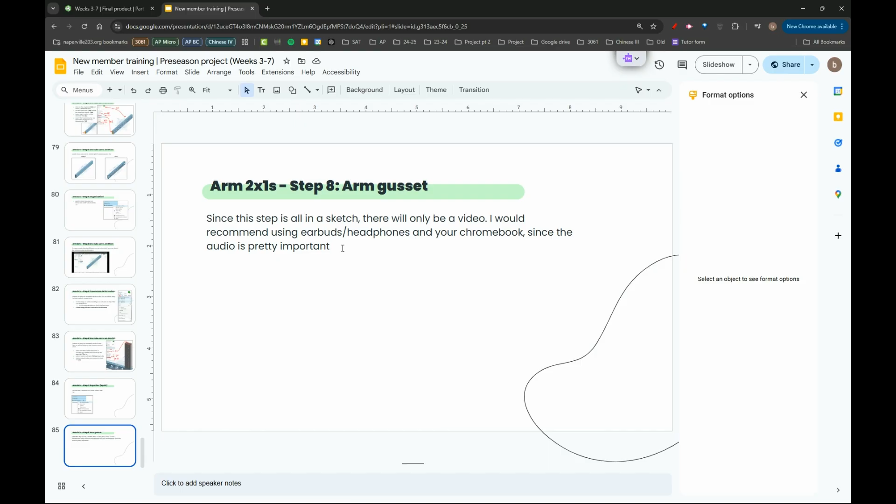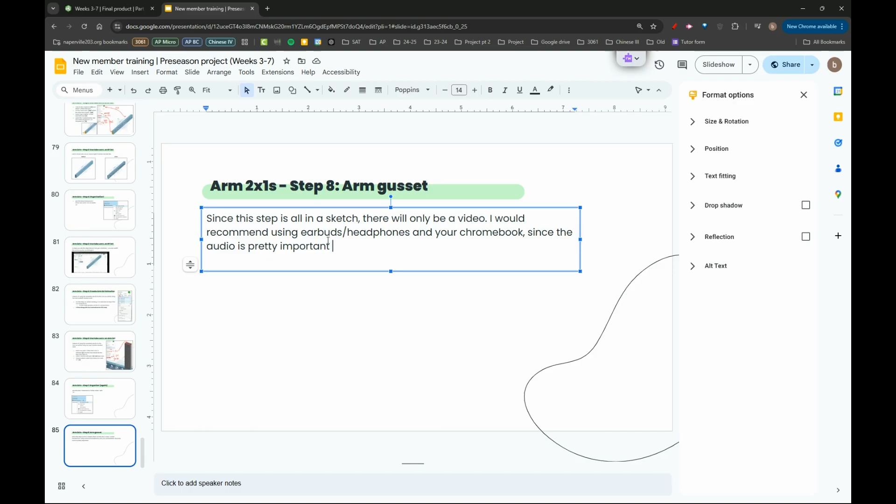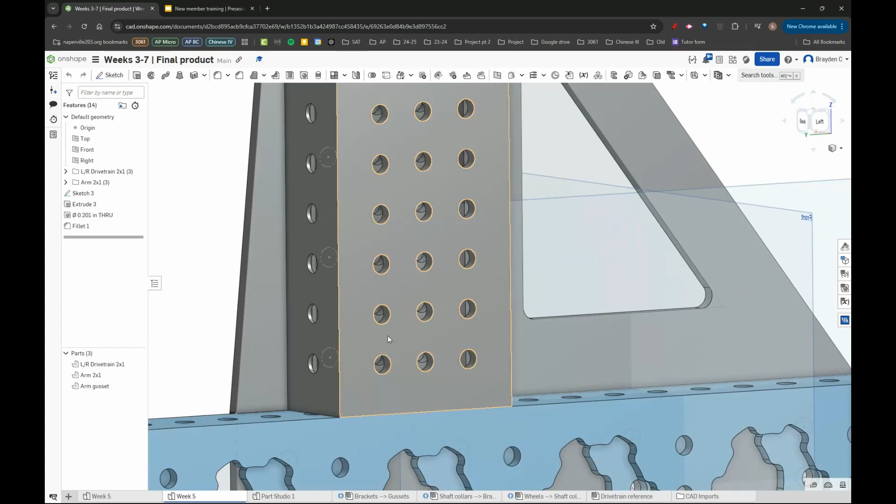So the gusset should look like this when we're done. You can kind of intuitively tell why we need this gusset, right? This 2x1 doesn't magically attach to this 2x1. There's screw holes here, but there's no screw holes for this 2x1 to directly connect. So instead we use this technique using gussets - we've already used it to attach the motors.

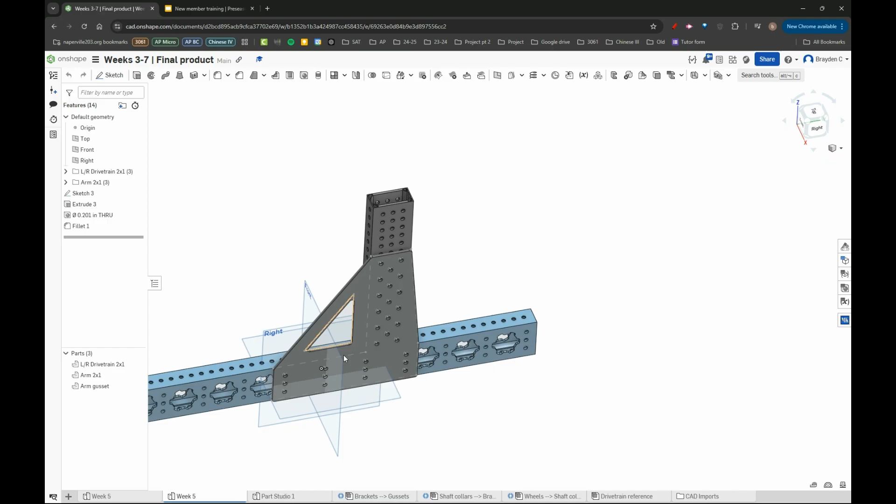We used it to connect the motor to the 2x1s, or the motors to the 2x1s. And so we're going to use a similar technique, but instead connecting two 2x1s. Without further ado, we are going to create our gusset.

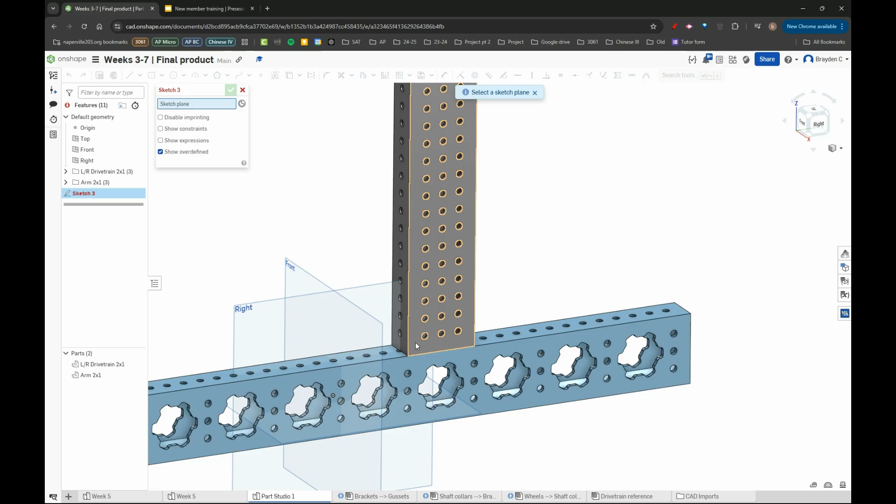So you want to create a sketch, and now you want to select this plane right here - I believe either of these two faces should be fine. Let me check... yeah, either of the two faces is completely fine. I would just select this top face here for consistency since I'm doing it, so just to avoid any errors, you might as well do it too.

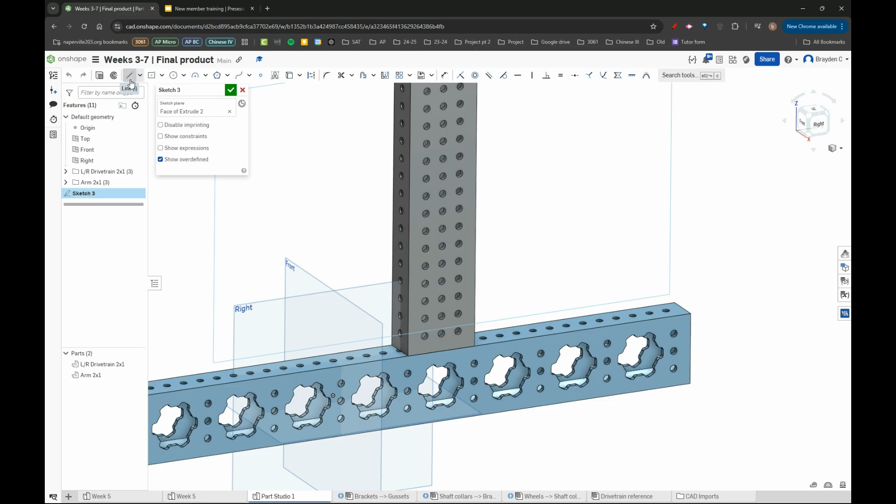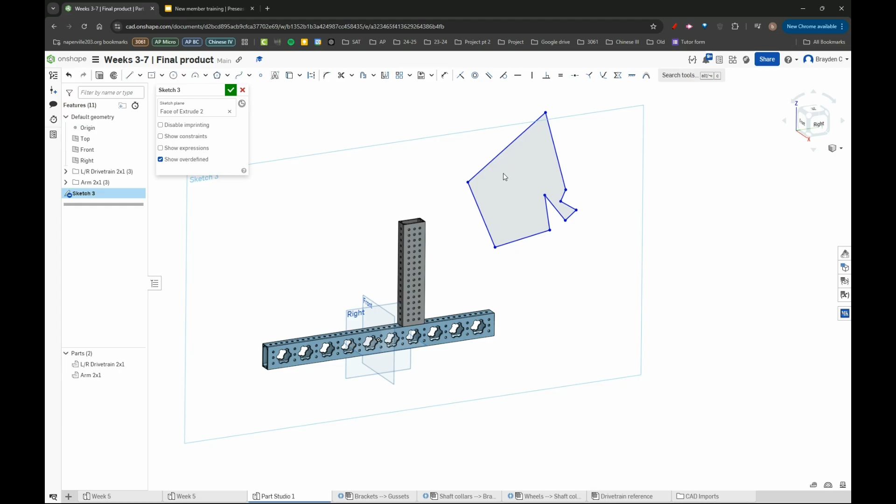So now we're going to create a line. The way we create something in a sketch is quite literally you draw it out with a bunch of lines - you just go like this, and then magically it will turn into some shape. Don't draw this, by the way, I'm just showing you that's how we create things in sketches for the most part. We'll use other things, but lines are by far the most versatile.

So what we're going to do is start off at the bottom here. You should see a yellow-orange outline over the bottom - that means your line will automatically be constrained or coincident to this line here. The thing you want to avoid is making sure there are no vertical symbols - if you have a vertical symbol here, that's not good, and you'll see why in a bit.

Left click once and then drag to the top of the 2x1 - see this line up here. Again, make sure you don't want this, this is bad because you see the vertical symbol attached to a point. However, a vertical symbol by itself with no reference just means the line itself is vertical relative to the entire sketch.

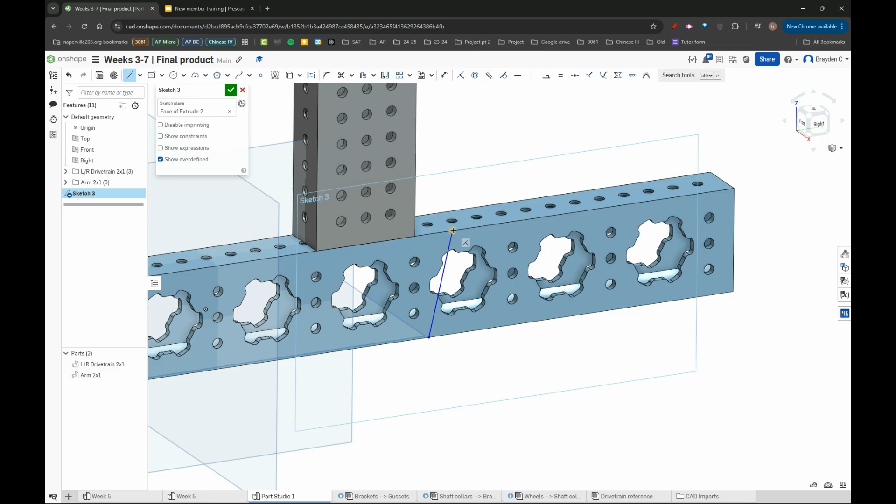For the purposes of this, because it's not consistent - it's different here and there - just make sure when you connect it to this line, the only constraint you see is that coincident constraint, the little T-shape constraint next to my line. Click on that, and sometimes Onshape will end your line. If that happens, click that point where you just finished and click that as your first point, your starting point, and now drag up to anywhere along this 2x1.

Just make sure it's not the midpoint - we don't want that little dot and the line between. We don't want the midpoint because then we can't change the height of the gusset. So instead, just anywhere along this line.

Again, if your line just ends itself, it doesn't create a new line - just select line again, which is just L, and then click the ending point of your last line, which is now the starting point of your new line. Then again, you want to connect your line to the left side of this 2x1.

A couple things you want to make sure of: ideally, don't have perpendicular - right now perpendicular means perpendicular to the line I'm about to draw, this yellow line right here. You also want to avoid a tangent, which will mess up a bunch of things. And perpendicular to the old line, you also want to avoid that. So if you see one constraint, that's good.

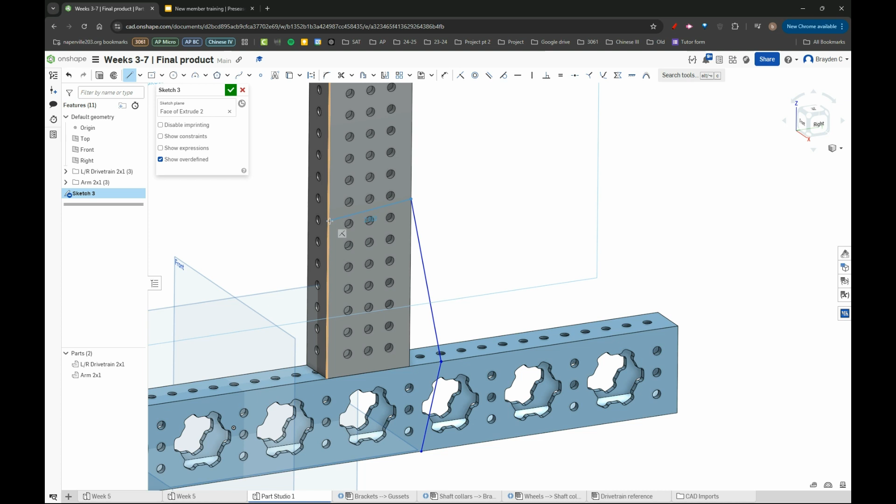And then now you want to drag your line left of this hole right here, and then to about here. Again, make sure there's no other constraints on that line.

The other thing you'll notice is now I have an arc. That's because if you have a line, and I drag my cursor over the tip of this, or the starting point, it becomes an arc. And if I do it again, it becomes a line. I don't know why Onshape is doing this, but if that happens to you, which will very likely happen, just know that's all it means - don't worry too much about it. Again, if I drag over this, it creates an arc; to get rid of it, you just drag back over. So now you want to create a line, or sorry, reference this.

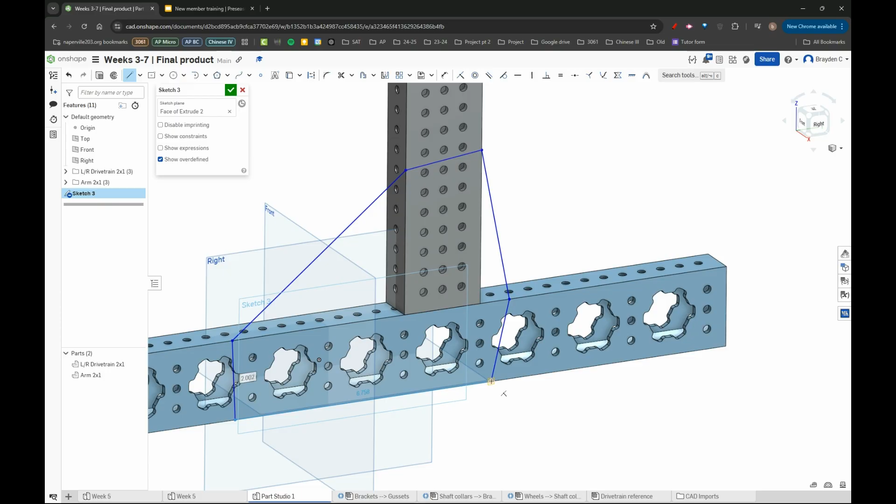You want to make your new line coincident to this line again, making sure to avoid referencing another point vertically. Click once on the line, and then draw. Now drag your last line to the first line's starting point. Click. Now you're done, or at least done with the first part.

Now we're going to do a bunch of constraints. We want to make this vertical, so just hit V. This one too, hit V. Here, you want to make this horizontal, so just click H. This one, also V.

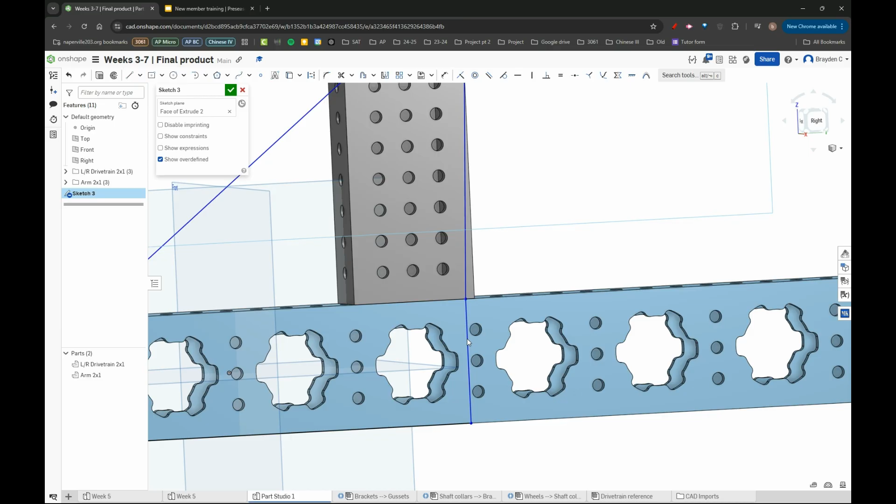Now make sure this line is right of these three holes. If it's not, like right here, drag it over to be about here. Now take the dimension tool and make sure it's on the right side of this hole. Then click this line, and this is the tangential distance, which is 0.25. We're going to set 0.25.

Actually I think it's 0.2. The reason I have you do it on the side closer to the right, or closer to this line, is because if you do the left side, Onshape will give you this dimension, which is not what we want. We want this dimension instead.

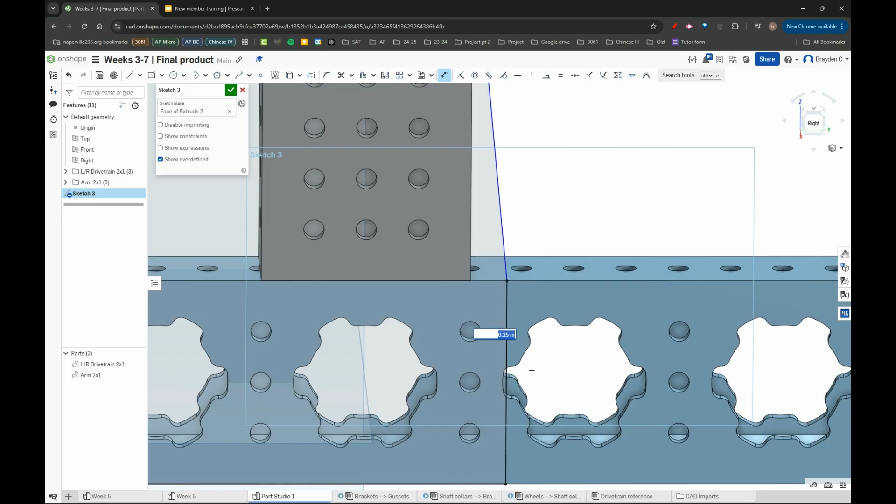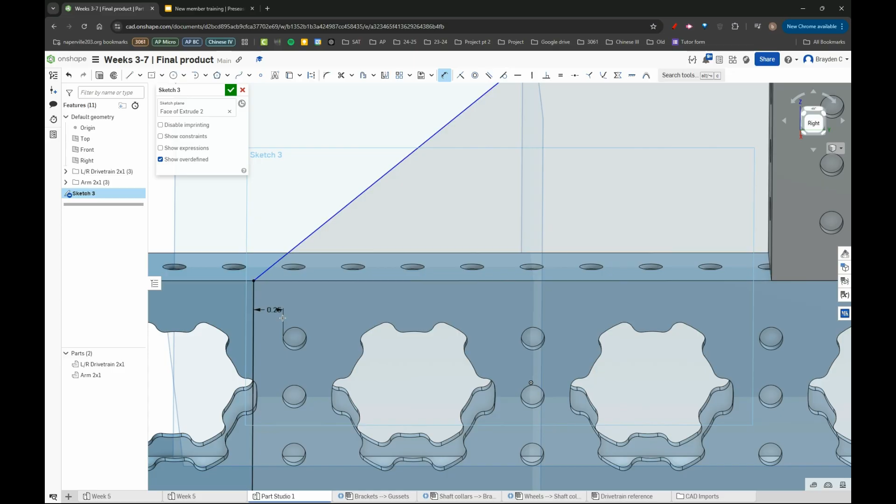Exact same process over here. Make sure this line is already left of these three circles, at a comfortable distance, not huge. Same process: make sure your cursor is coming from the left side, dimensioning this circle from the left, then dimensioning to that line right there, again 0.25 inches.

Now, if I remember correctly, how tall is it? Oh, it's 8, so we're going to make this 8 inches tall. We'll reference from this line to this bottom line. This is 8 inches. Now, for the most part, we're kind of done.

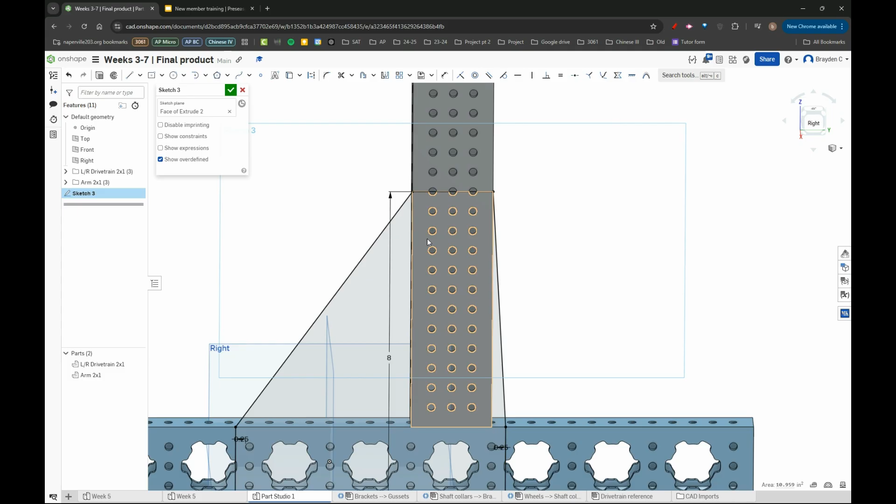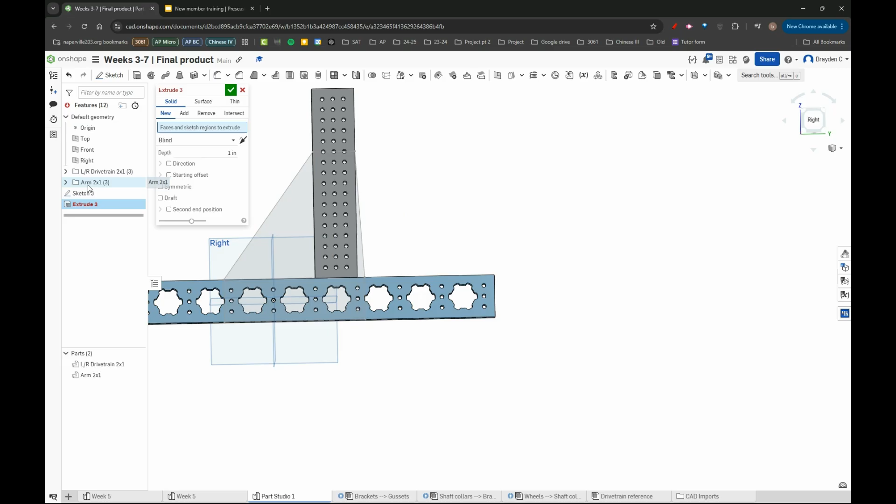We have a couple more things to do. Once you're done with that, good to go, and then you're going to hit extrude. If I do this right now and hit extrude, you'll notice I have all of these circles I have to fill in, like we did with this 2x1. However, there's a much faster way, which is to just click the sketch, and it'll extrude all of the faces for you.

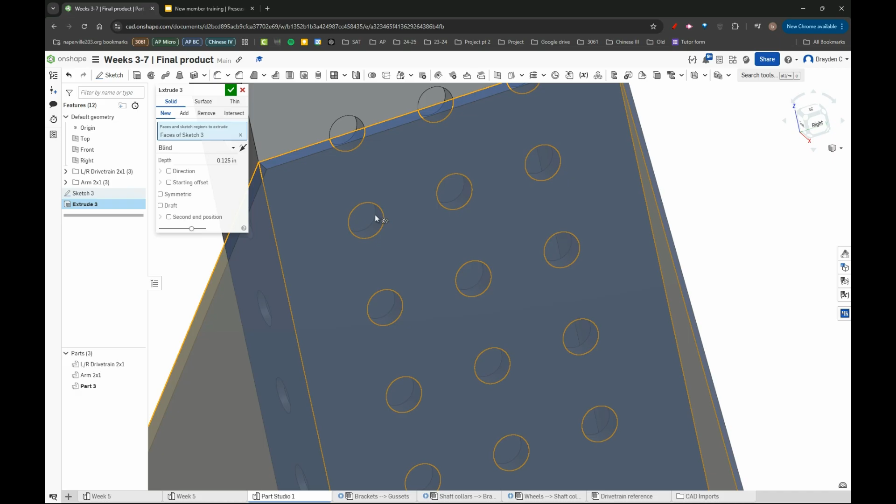Basically, that allows you to select not just one face, but every single face in the sketch. Actually, a cool trick: let's say I didn't want this hole specifically, I could just select this sketch's faces, not just one face, and select this hole instead. There's a lot, but it'll do all of it for you really quickly. That's not what we want though, so we're just going to leave it like this.

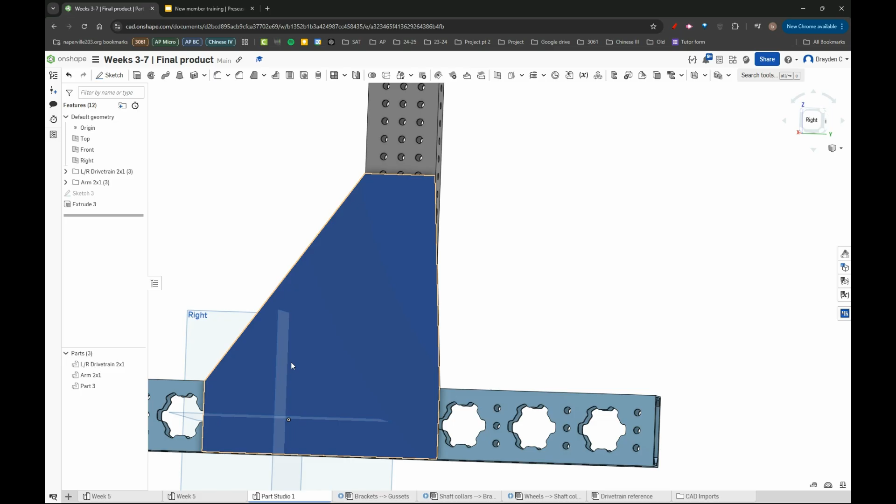Our next step will involve... I keep forgetting what we did, this was a while ago. Okay, so we have to go back to our original sketch, and now what we're going to do is the project convert, or project construction technique. We're going to use the same thing again.

So you want to do that zigzag pattern. Not that exact zigzag pattern, but a similar one. Basically these 5 holes in an X shape, and then keep going down, like this, like this, like this. If you notice, it's this hole, this hole, this hole, this hole, and you keep repeating this pattern.

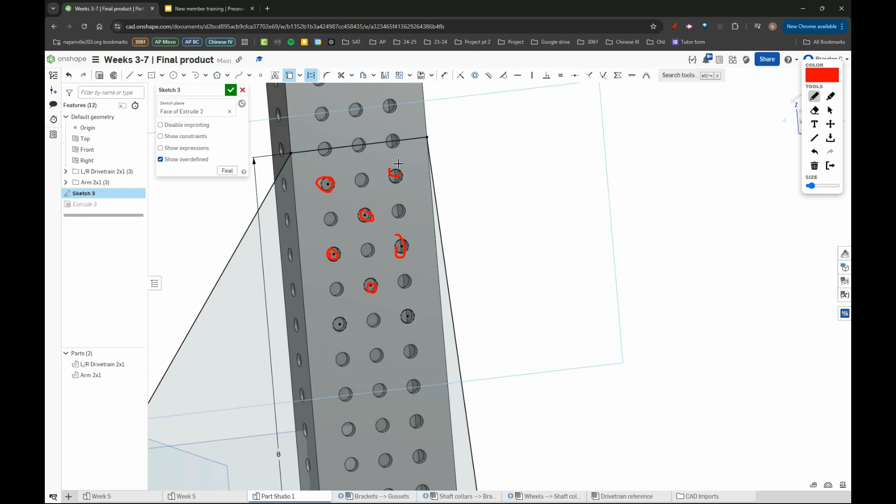So we're just going to keep going. I'm going to skip ahead a little bit. Okay, so now I've completed all of these in a zigzag pattern. I didn't want to bore you guys to death.

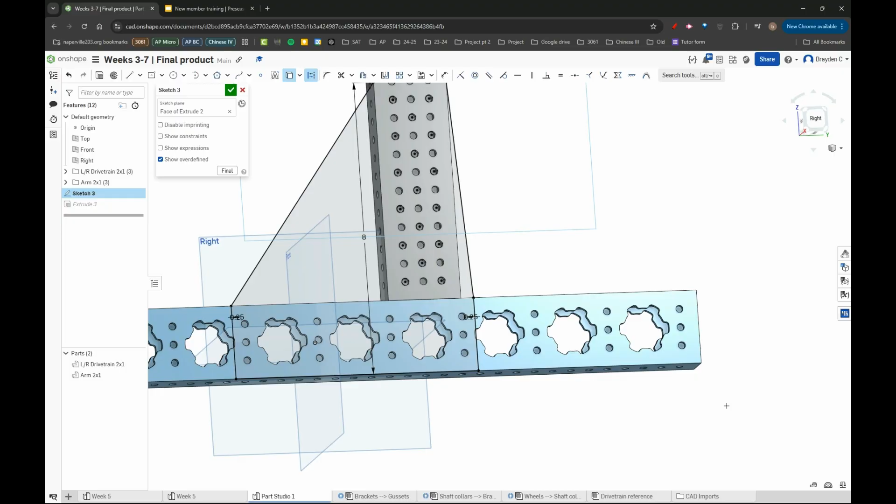Now you're going to select these 12 holes using the project construction technique. You guys know how to do it, so I'll quickly finish it up. Okay, once you're done with that, it should look like this. You should see those holes. We want each of the holes on the gusset.

Once you're done with that, click the check mark, and then we're going to use select hole, again what we did with the motor gussets. However, you also want to make sure you show this sketch, because right now I can't click on anything, there are no points for me to select. So you have to click the little eyeball and show the sketch. Now I can actually use the different parts of the sketch.

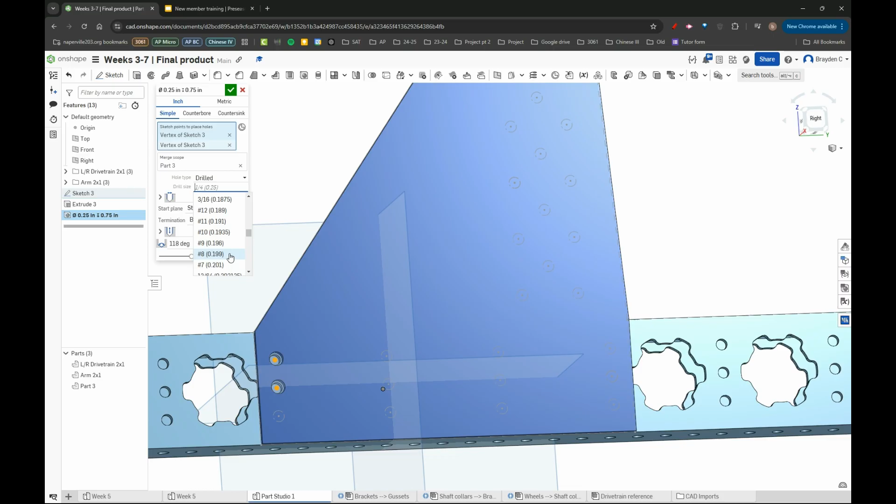Think, make sure this is set to number 10, if I'm not mistaken. I don't know why it's not number 10 for me. Or is it number 8? I honestly don't remember. These look like number 8s.

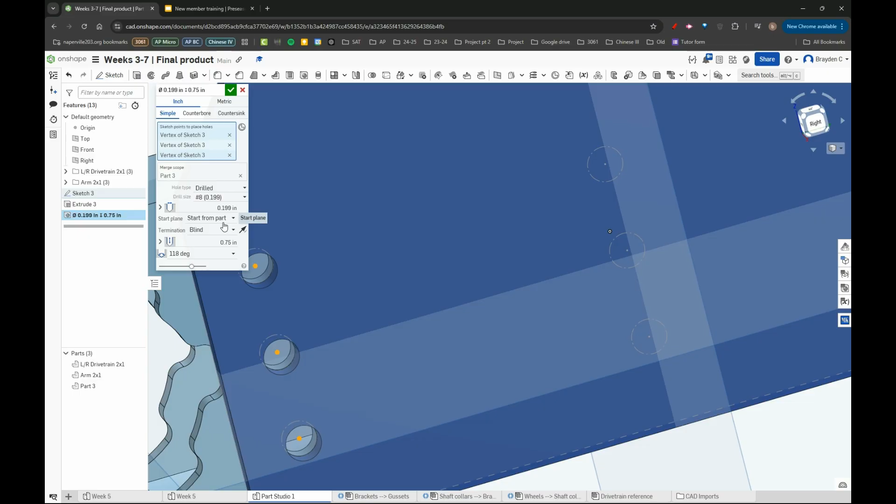Wait, it should be clearance. I don't know why it's not clearance. Is it tap? I don't know. It's typically preset correctly, I'm not sure. For you guys it should be set correctly. If it's not, it should be.

Drill just means a tight fit, but a fit that still works. Clearance means it's a very loose fit. Tapped means there's threading through it, which obviously is not what we're doing in gusset.

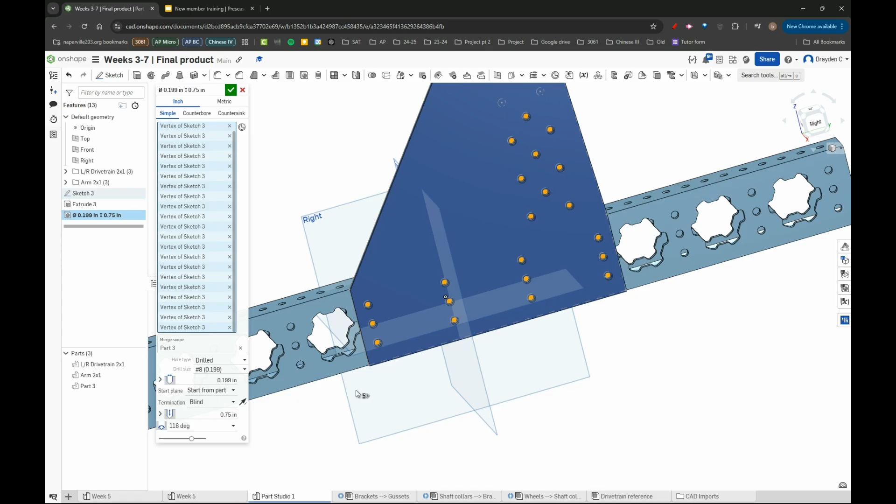So we're just going to select all of these holes, make sure they're cracked. This should be 0.196. I'm not entirely sure why. Or no, it's 201 clearance. Oh okay, so clearance, okay wait sorry. Clearance number 10, okay that's right. Should be right, yeah.

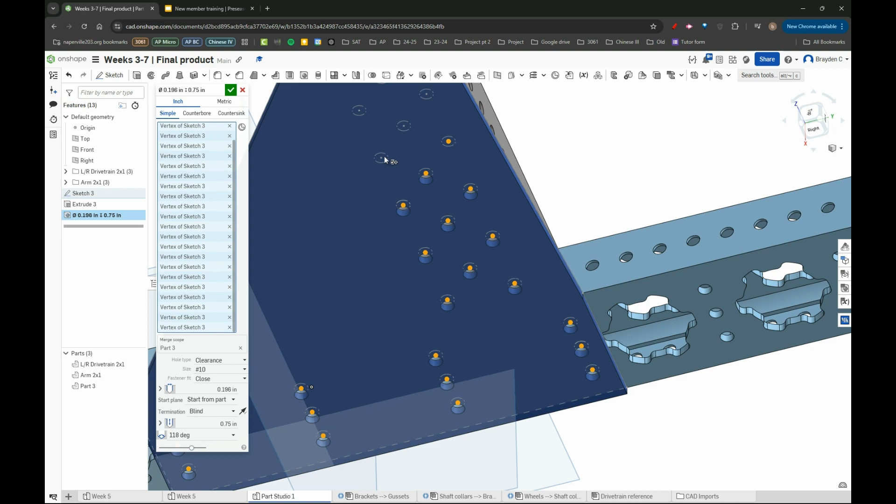There we go, now we select all of these holes. And here we go. Just to reiterate, make sure it is clearance number 10. Check mark.

And then you want to rename this part to something like 'arm gussets.' Something as simple as that.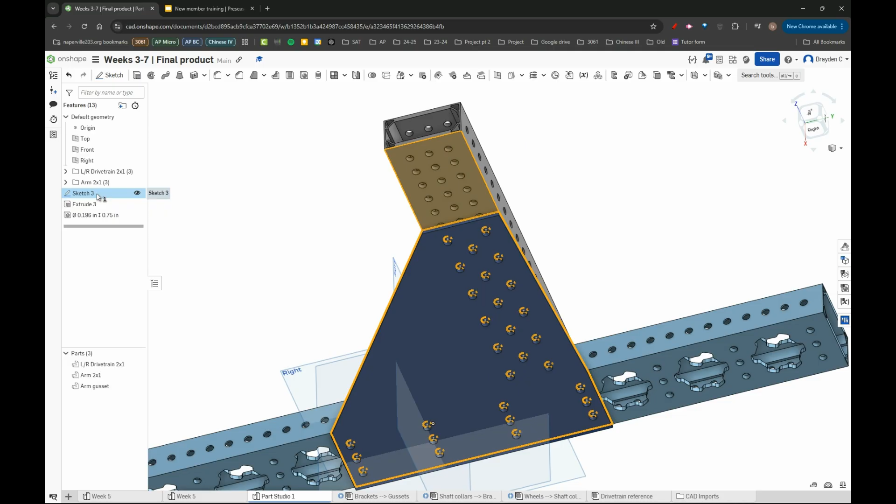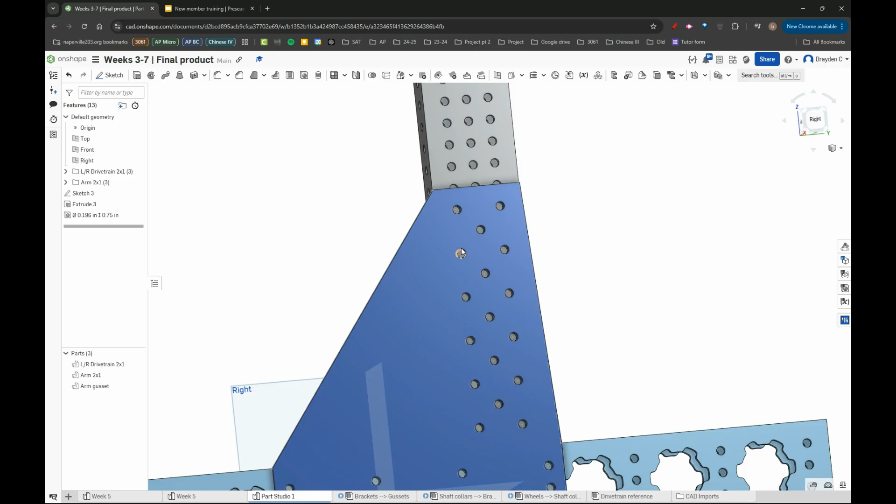And we're going to go back into sketch 3 and actually lighten this part, which basically means reduce material used. Because obviously this entire section here, so like all of this, if we want to be efficient, is pretty much waste material or extra weight that we don't need to have.

So typically what we do is just cut out a part of it. What we're going to do is go back into sketch 3, and you are going to take a line from here, create a line from here to the very bottom of this 2x1, all the way to this point right here. So it should look like this. You should have these 3 lines, or this one already exists, but these 2 lines should now be created.

You're going to hit offset, which is pretty cool. And then now you want to select these 3 lines that make up this triangle. You want to drag this inward, if I'm not mistaken. Why did that create 2? Right, okay, Onshape likes to do that. I don't know why, but anyway, this distance should be 0.75.

Obviously it should be inward. If it's outward, by the way, if let's say it was like this by accident, that's fine - you would just change it to a negative value, like I just did there, which just reverses the direction of the dimension. And then, yeah, that's good. So now you're done with that.

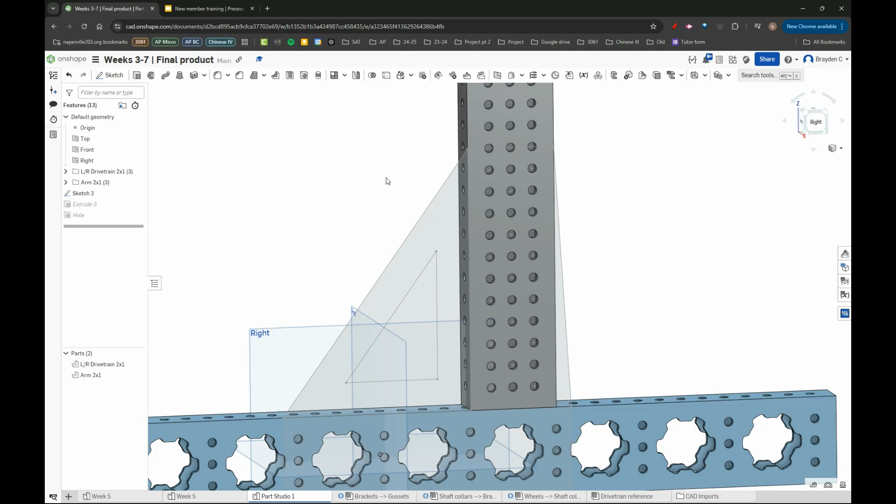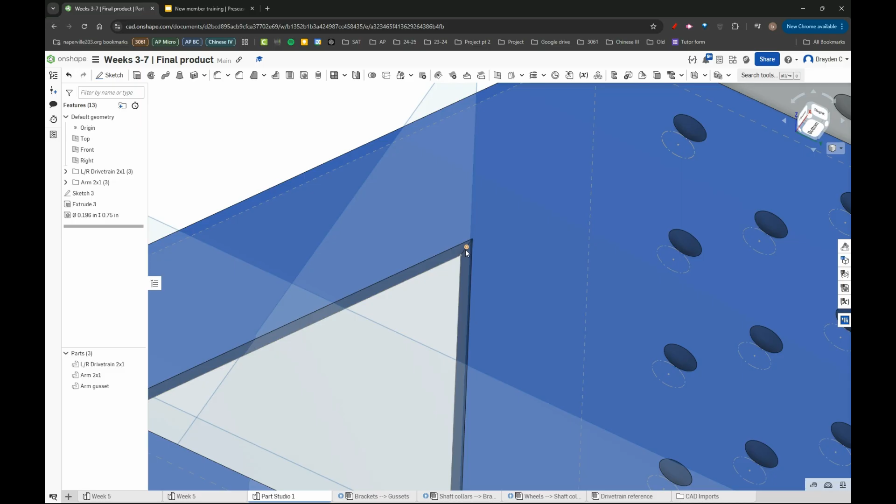Something important to know though is when you create gussets, sharp corners are your enemy. You want to avoid them at all costs, especially what are called internal sharp corners. This basically means less than 180 degrees - inside, like this would be inside because this is creating a shape inside.

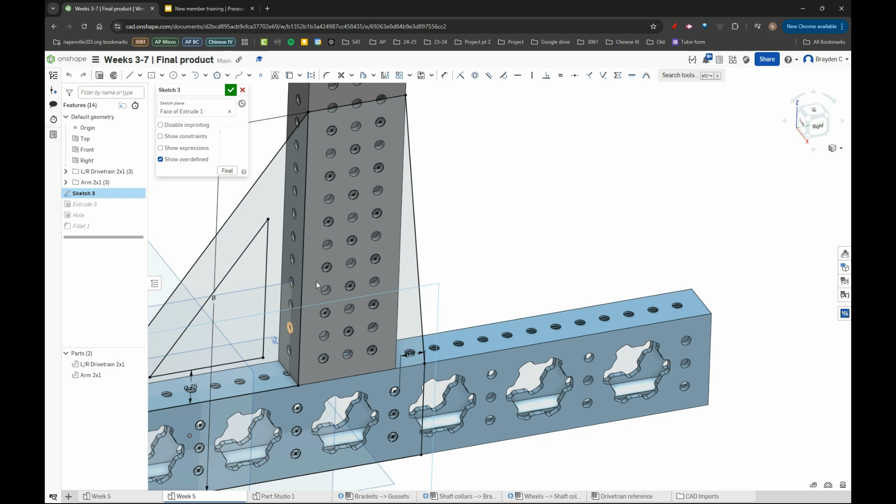So instead, what we're going to do is we're going to fillet it. We're going to select fillet. For purposes of this, I think it's just an eighth of an inch, if I'm not mistaken. Check real quick. So it should just be... yeah, okay, so it is just an eighth of an inch.

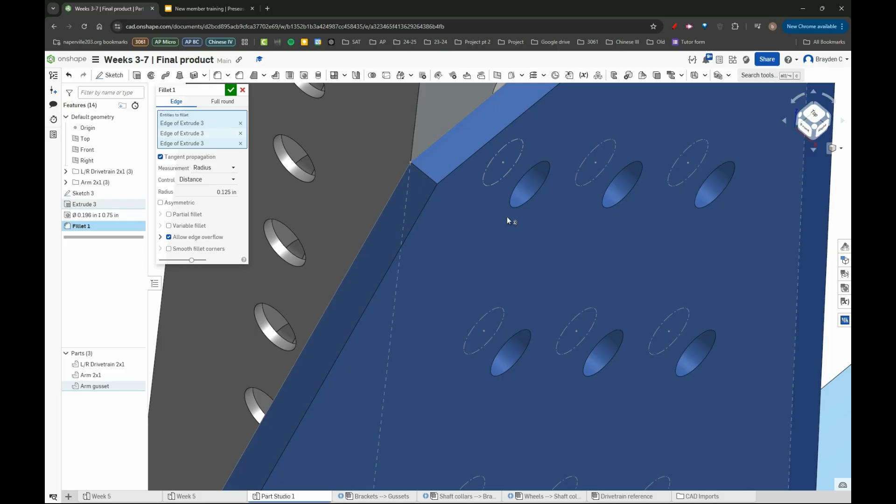As you can tell, you are going to select these corners here, which will basically turn your gusset into something that another sub-team called CNC Fabrication can actually make now. Because of the way CNC works - I'm not going to get into too much detail here, but just know that sharp corners... our CNC lead, his name is Andy, he will yell at you. So don't do that. Don't make him yell at you.

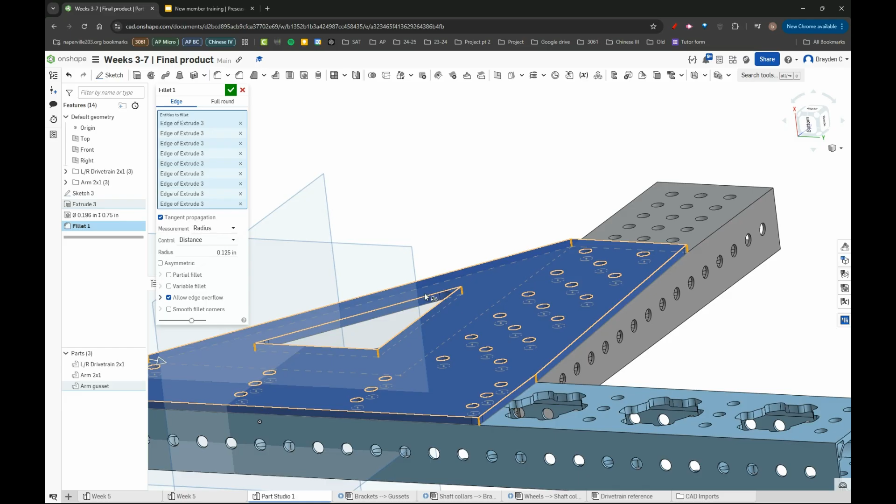So yeah, you want to select all of the outer corners, right? So the corners here, all of these, and all of these three inner corners, and it should be good.

And now you're done. Except you're not, because we need to edit the color of gussets - we usually do a light gray. This color right here, 2x1s, I don't think we've standardized it.

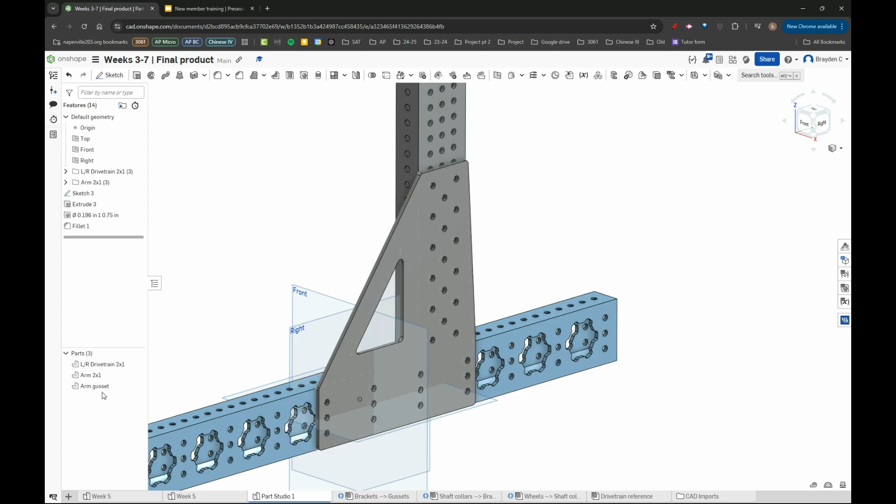And then this part is optional. Actually, yeah, you can leave the colors - it's not too big a deal. This part is not required, but I would still do it.

Assign material for all of the parts. By the way, you have to search up in here to aluminum 6061. Scroll down a little bit, 6061, almost like 3061. And then click check mark.

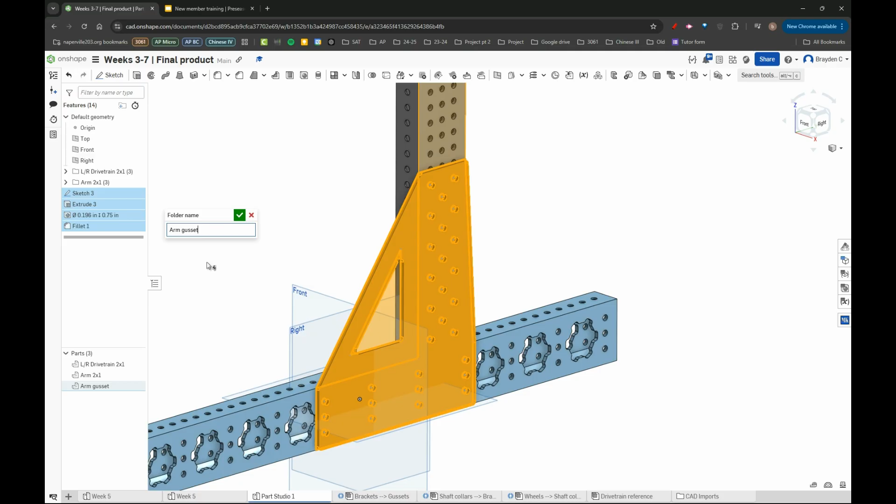You could do the same thing for the other parts, and then again add these to a folder called arm gusset, and then you're done. And then we will pick up next week.